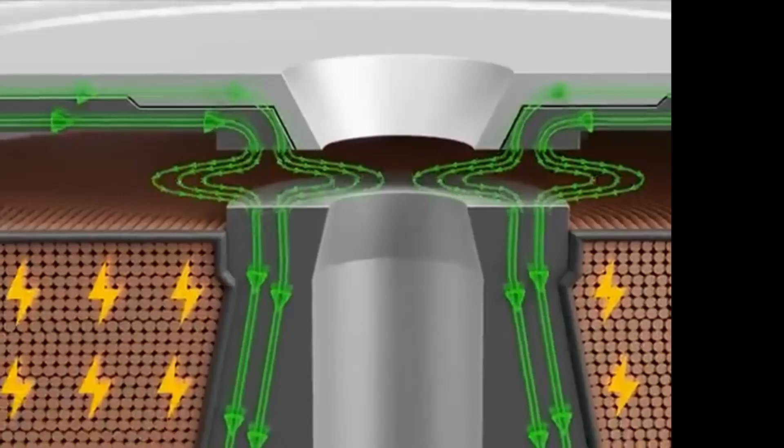And what is actually happening inside the strange material when you try to bend it? Let's go down to the atomic level.

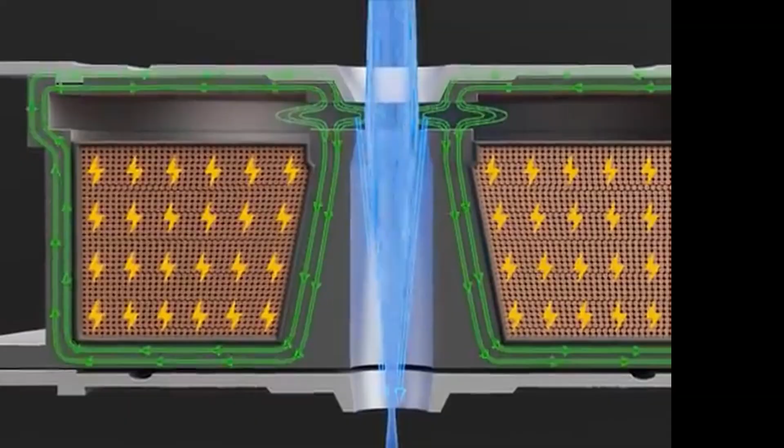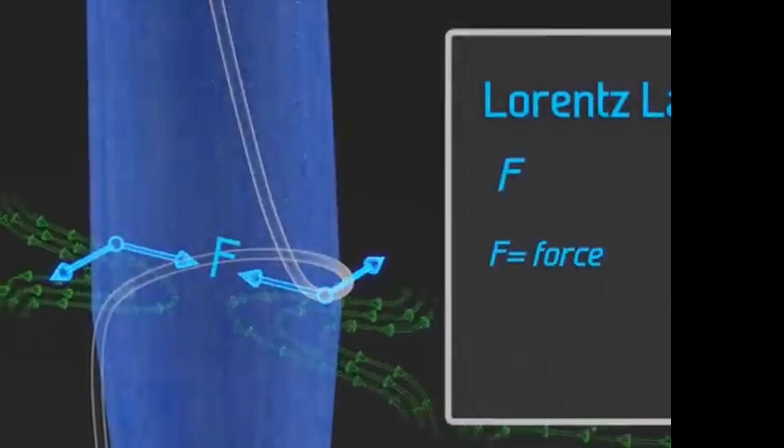Think about a piece of steel. It's strong, it's tough, it's relatively easy to manufacture, and it's been one of the foundations of modern civilization: buildings, bridges, cars, machines, ships, industrial equipment. But steel isn't perfect, and engineers have spent generations trying to improve it.

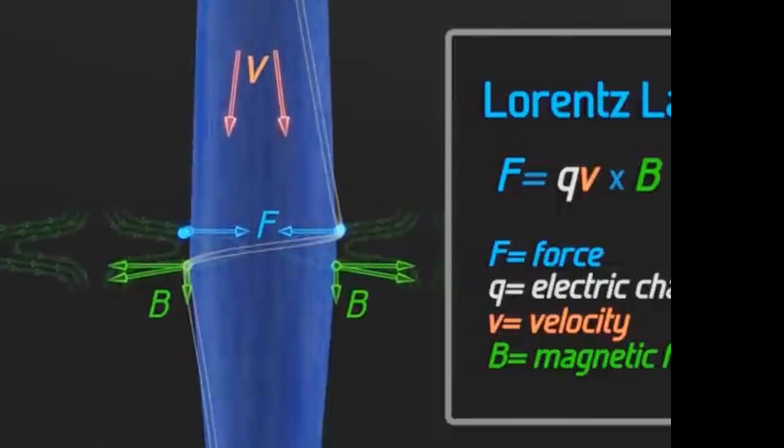More strength is desirable. Less weight is desirable. More heat resistance is desirable. More durability is desirable. But there is a fundamental problem: when you push a material toward extreme strength, you often make it more difficult for that material to deform.

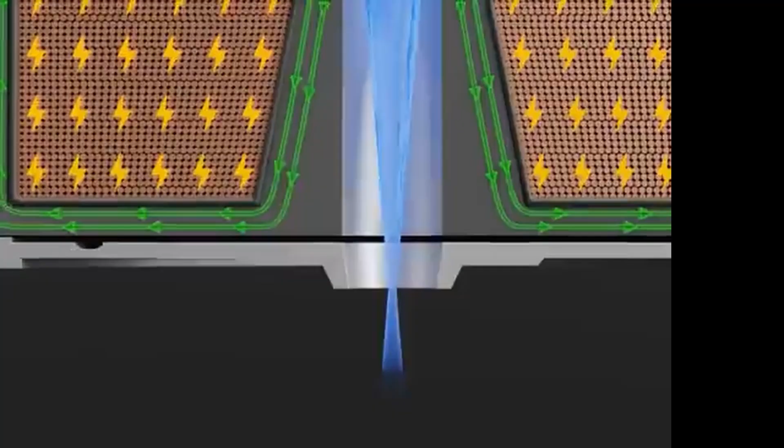And that can be dangerous, because imagine two materials. One is extremely strong but brittle. The other is somewhat weaker, but can deform before it fails. Which one would you rather have supporting a critical aircraft component?

The answer isn't necessarily the strongest one, because sometimes you don't want a material to simply resist deformation forever. You want it to give you a warning. You want it to absorb energy. You want it to deform rather than suddenly fracture.

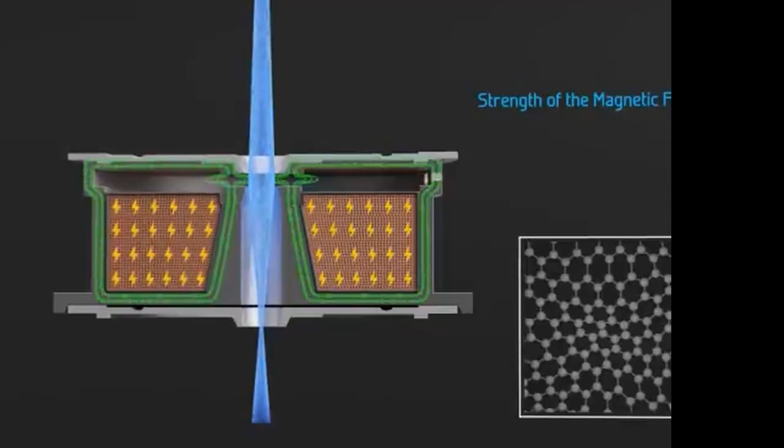And this is where material scientists encounter one of the great challenges in engineering: strength versus ductility. How do you make something extremely strong without turning it into something that breaks like glass?

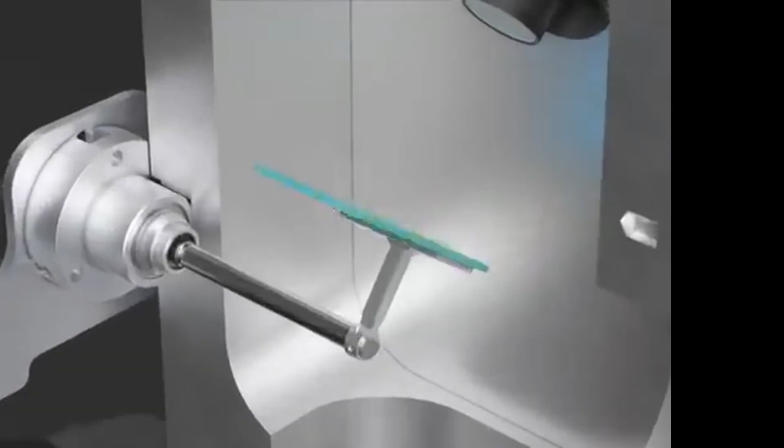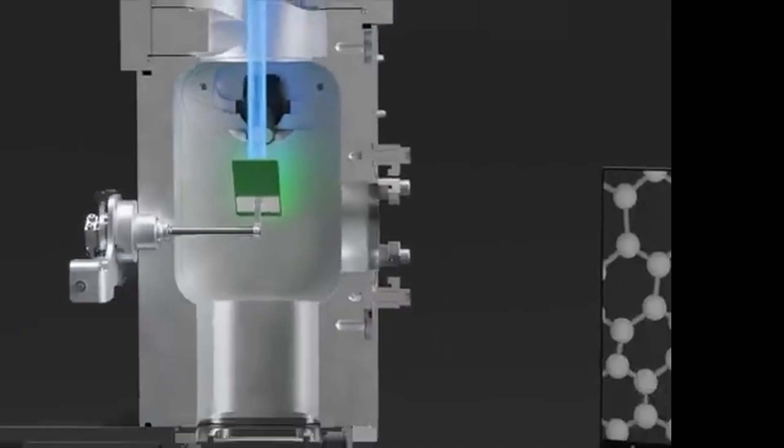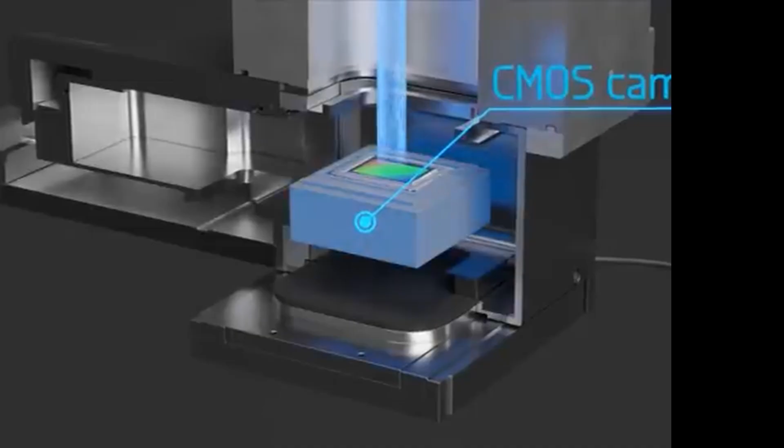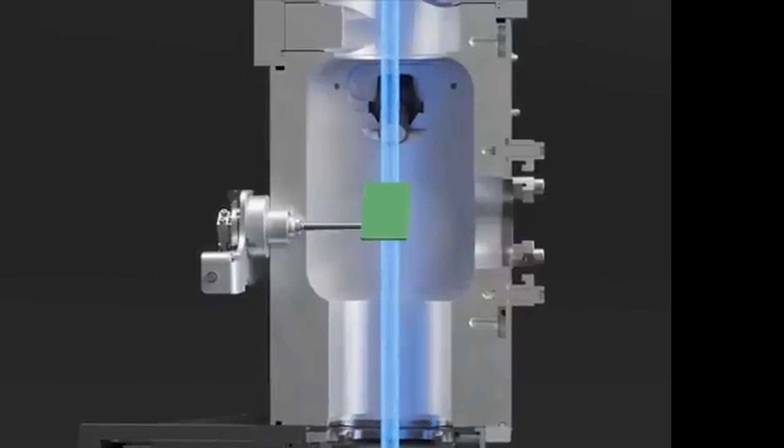This is where the Purdue researchers turned their attention to an unusual material called cobalt aluminum, or CoAl. CoAl belongs to a class of materials called intermetallics. Intermetallics are fascinating, they're made from metallic elements, but their atoms arrange themselves in highly ordered structures. That unusual atomic organization can give them remarkable properties: high strength, high melting temperatures, resistance to deformation at high temperatures, resistance to creep. All of those characteristics make intermetallics extremely interesting for demanding applications. There's just one problem: many intermetallics are notoriously brittle, and CoAl is a good example.

Normally, if you have a material that's incredibly strong but prone to brittle fracture, you have a serious engineering problem. So the researchers asked a deceptively simple question: could you change a material's internal structure instead of simply changing what the material is made of? That question led them somewhere very interesting.

All of those characteristics make intermetallics extremely interesting for demanding applications. There's just one problem: many intermetallics are notoriously brittle, and CoAl is a good example. Normally, if you have a material that's incredibly strong but prone to brittle fracture, you have a serious engineering problem.

So the researchers asked a deceptively simple question: could you change a material's internal structure instead of simply changing what the material is made of? That question led them somewhere very interesting.

Imagine zooming inside a piece of metal. At first, it looks completely solid, but zoom in far enough, and you discover an enormous world of atoms. Those atoms form crystal structures, and those crystals aren't perfectly flawless. They contain imperfections, and one of the most important types of imperfections is called a dislocation.

The name sounds like a defect, and technically it is, but here's the strange thing: sometimes a defect is exactly what you need. Dislocations allow layers of atoms to move relative to one another, and that movement is part of what allows metals to deform plastically. So if you could somehow engineer the right number of dislocations and control how they move, could you make a normally brittle intermetallic deform instead of simply cracking?

That was the challenge, and the researchers found a way to manipulate the material on a nanoscale. They introduced a huge number of dislocations into the CoAl during fabrication. But they also created something even more unusual: a network of amorphous interfaces.

Think of these interfaces as extremely small boundaries inside the material. Unlike the surrounding crystalline regions, these boundaries don't initially have the same orderly atomic arrangement. And that difference turns out to be extremely important, because when a material begins to deform, those interfaces can actually help generate new dislocations. It's almost as if the material contains its own microscopic system for accommodating deformation.

This is where the story starts to sound less like traditional metallurgy and more like science fiction. Imagine an army of tiny robots. They're standing in perfectly organized rows. Everything is orderly, everything is rigid. Then suddenly, the structure is pushed. Instead of the entire system collapsing, certain parts begin moving. New pathways open, and the structure reorganizes.

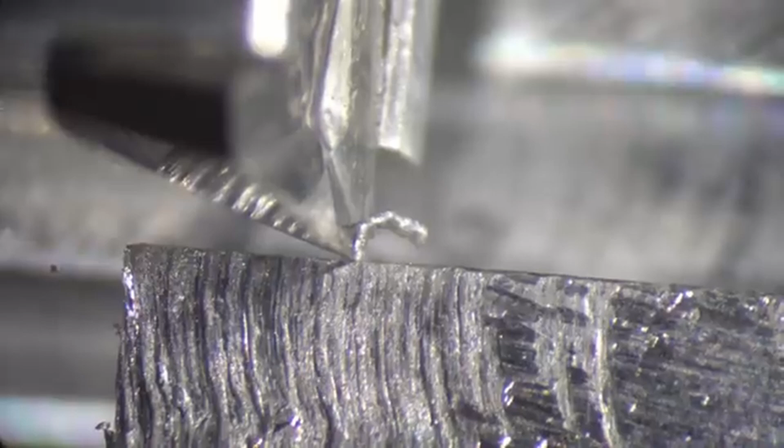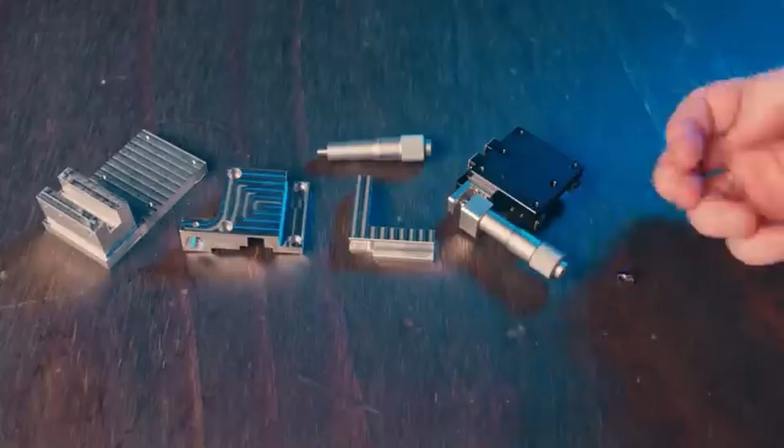Now, obviously, real-world CoAl doesn't behave like Beskar. There's no evidence that it can stop a lightsaber. It doesn't possess magical properties, and it isn't some indestructible supermetal. But the reason the comparison works is because both ideas revolve around something engineers have wanted for a very long time.

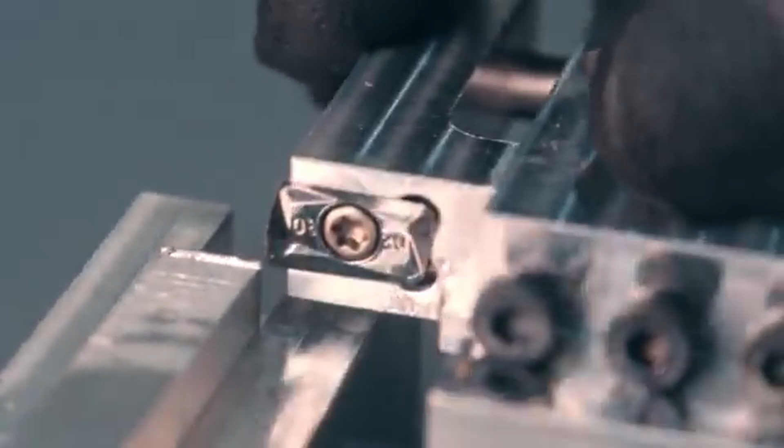Extreme strength without catastrophic brittleness. And that is actually a much more interesting scientific problem than simply inventing something that is stronger than steel. Because stronger isn't enough. What if your supermaterial is so brittle that one tiny flaw causes catastrophic failure? What if it can't be manufactured into complicated shapes? What if it can't tolerate repeated loading? What if it works beautifully in a laboratory, but falls apart when exposed to real-world conditions?

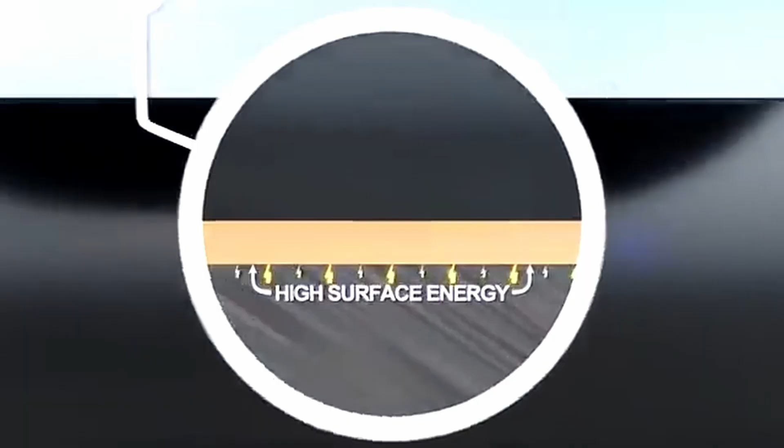That's why this new material is so interesting. The breakthrough isn't simply the number, it's the combination of properties. Let's put that number into perspective.

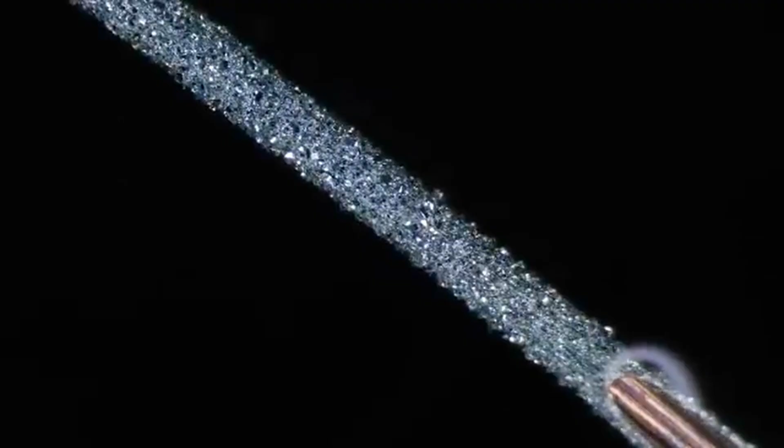The researchers reported a yield strength of approximately 6 gigapascals. A gigapascal is a billion pascals, and yield strength tells us approximately how much stress a material can withstand before it begins to undergo permanent deformation. For this specially engineered CoAl nanolaminate, that number is enormous.

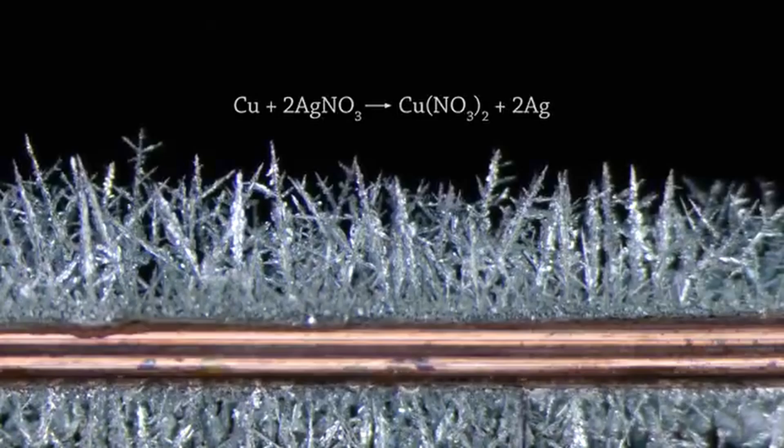Researchers describe it as approximately 6 to 10 times the yield strength of high-strength structural steel. But here's where we need to be careful: that doesn't mean you can take any random piece of this alloy, compare it with any random steel beam, and say this is 10 times stronger. Materials aren't that simple. Strength depends on what property you're measuring, how the material is processed, its structure, its dimensions, the type of loading, and the testing conditions.

The spectacular result here comes from a specially engineered nanoscale material architecture, and that's actually the more exciting part. Because the researchers are rediscovering a way of designing the internal architecture of a metal to produce properties that normally don't coexist, they aren't merely discovering a stronger ingredient.

Now comes the moment that really makes this material stand out. Imagine you have an extremely strong material. You expect it to be rigid, you expect it to resist deformation, and you certainly don't expect it to tolerate substantial plastic strain.

But in compression testing at room temperature, this CoAl system sustained about 15% plastic strain. That's remarkable because bulk CoAl is normally very brittle at room temperature. So why doesn't it simply crack?

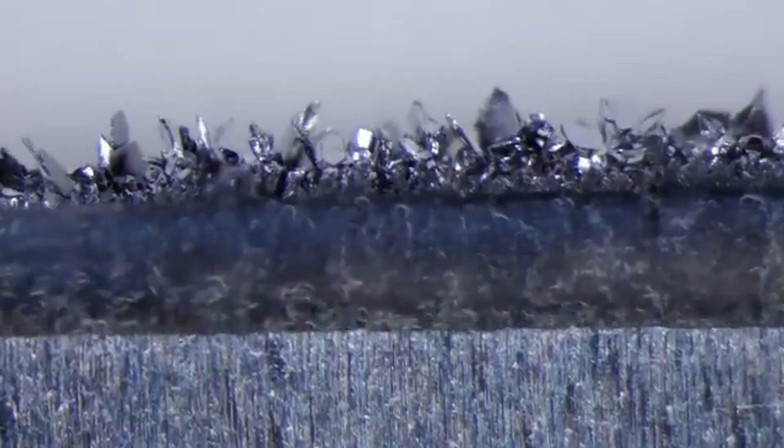Because the nanoscale architecture changes the way deformation happens. Instead of allowing a crack to race through material, the engineered interfaces and dislocations provide mechanisms for the material to accommodate stress. And that raises another fascinating question.

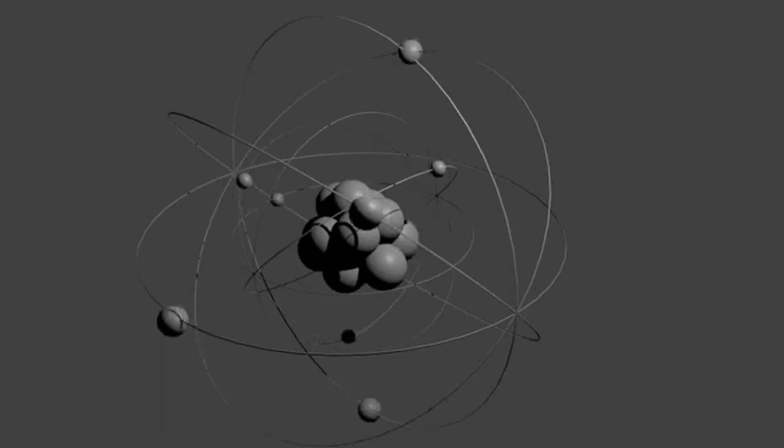Could the real future of materials engineering be less about discovering new elements and more about learning how to arrange the atoms we already have? Think about that. The periodic table isn't changing. Cobalt isn't suddenly a new element. Aluminum isn't suddenly a new element. The breakthrough is in the architecture. The researchers are manipulating matter at scales so small that we're effectively engineering the behavior of atoms and defects inside material. And that could be a profound shift.

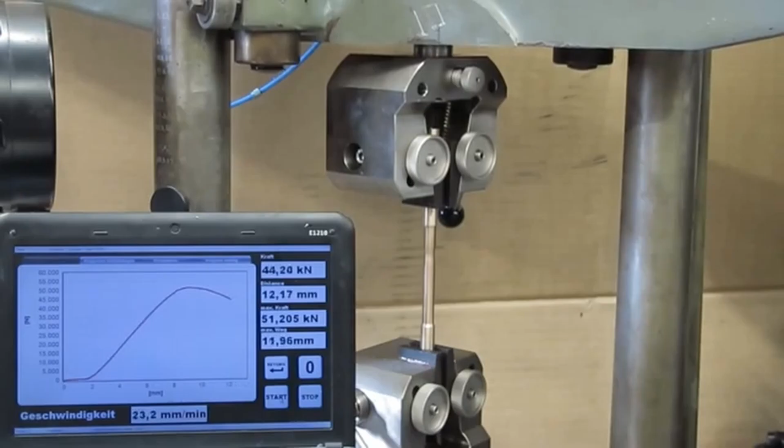Now imagine where a material like this could become useful. One possibility is turbine engines. Inside a gas turbine, components experience tremendous mechanical forces and extreme temperatures. A turbine blade is spinning incredibly fast, and as it spins, centrifugal forces are constantly trying to pull the material apart. Now imagine being able to build components from a material that could withstand substantially higher stresses. Could an engine spin faster? Could components become lighter? Could engineers design more efficient systems? Could future aircraft engines operate under conditions that would be too demanding for conventional materials? Those are the kind of questions researchers are beginning to investigate.

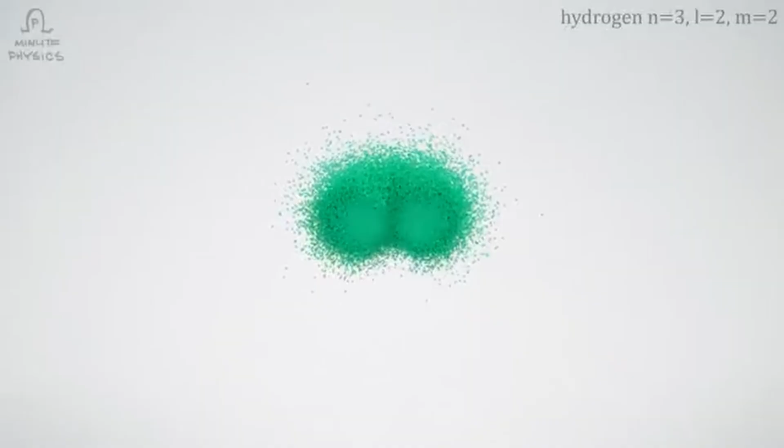The Purdue team specifically points toward potential applications in turbine blades and next-generation aero engines. And the implications go beyond aircraft. The same fundamental challenge appears in power generation energy systems, advanced manufacturing, space technology, and other environments where materials are pushed to their limits. Here's where the science gets even more interesting.

This material isn't ready to replace steel everywhere tomorrow. And that's important because laboratory breakthroughs and commercial technologies are two very different things. The researchers produce their alloy using a technique called magnetron sputtering deposition. Instead of simply melting a pile of metal, pouring it into a mold, and letting it cool, the process allows the material to be built from alloy vapor. That unusual, non-equilibrium manufacturing process helps create the nanoscale architecture and high density of dislocations that give material its unusual properties. But here's the challenge.

Can you make it at industrial scale? Can you produce large components? Can you manufacture complicated shapes? Can the properties remain consistent throughout a large object? Can the material survive millions of cycles? Can it handle extreme temperatures? Can it be economically manufactured? Those questions still need answers. And that's why the next stage of this research could be even more important than the initial discovery.

The researchers are looking at whether the same strategy can be applied to bulk alloy nanocomposites and potentially to other intermetallic materials. If the concept proves broadly applicable, then the discovery becomes much bigger than one unusual alloy. It becomes a new strategy for designing metals.

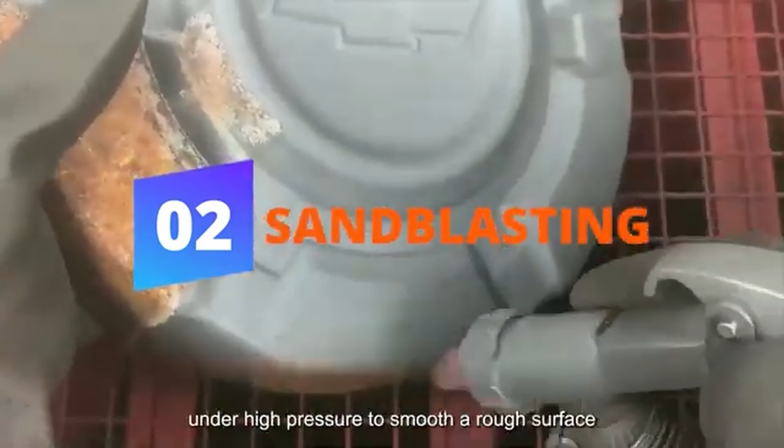And that's where Marvel's vibranium provides another interesting comparison. Vibranium is fictional, but the idea behind it is strangely familiar. A material that seems to violate the normal rules. A material that can absorb extraordinary amounts of energy. A material that possesses properties far beyond ordinary metals. Real materials obviously don't behave like vibranium, but science has repeatedly shown us something remarkable. Properties that once seemed impossible can become possible when we change the structure of matter. Carbon can become diamond. Silicon can become the foundation of modern computing. Metals can be engineered at nanoscale dimensions to behave in ways their conventional forms don't.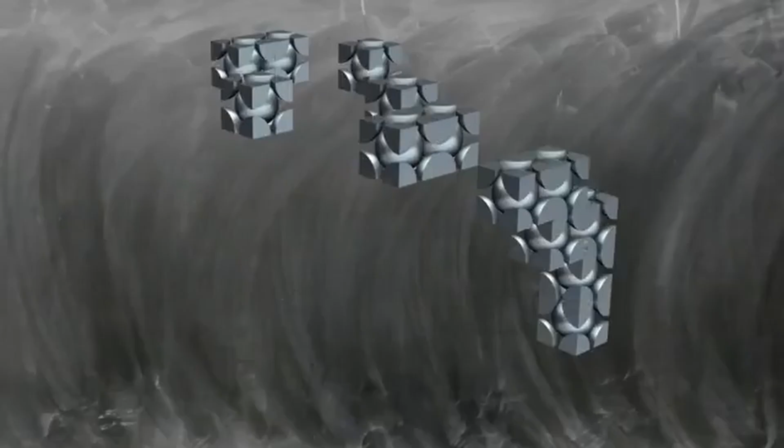And now, we're learning how to make an intermetallic that combines extreme strength with unusual deformability. So perhaps the better question isn't, when will scientists invent vibranium? Maybe it's, how many properties that seem impossible today are simply properties we haven't learned how to engineer yet?

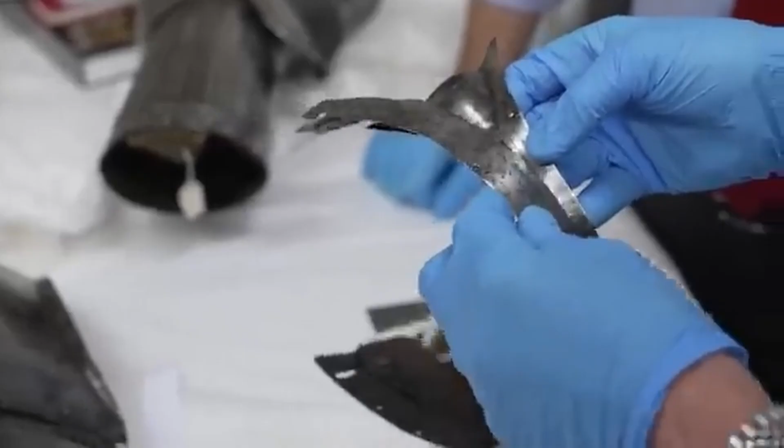Because deep down, that's what this discovery is really about. It's a battle happening at a scale far smaller than anything we can see. Atoms are arranged, defects are introduced, interfaces are engineered, stress begins moving through the material, and microscopic structures respond. The final piece of metal may look completely ordinary to the naked eye, but inside, there's an elaborate architecture, and that architecture determines whether the material bends, deforms, or breaks.

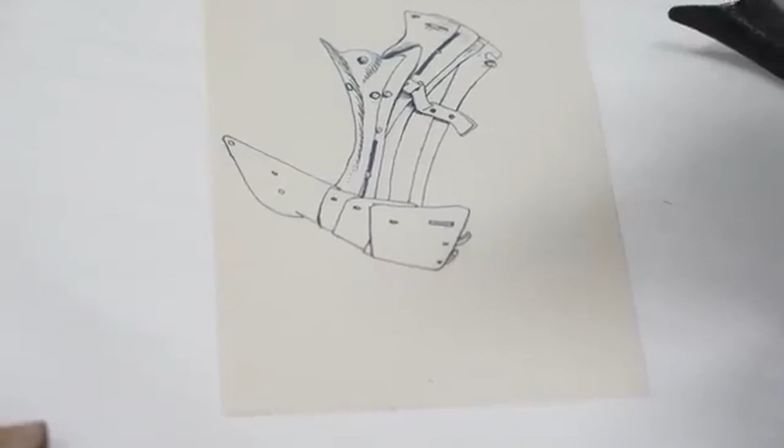This is one of the most fascinating things about modern materials science. We used to think of materials largely in terms of what they were made from: steel, aluminum, titanium, copper. Now we're increasingly thinking about something different. How are the atoms arranged?

Because two materials with essentially the same ingredients can behave dramatically differently if their internal structures are different. And that's exactly what this research demonstrates.

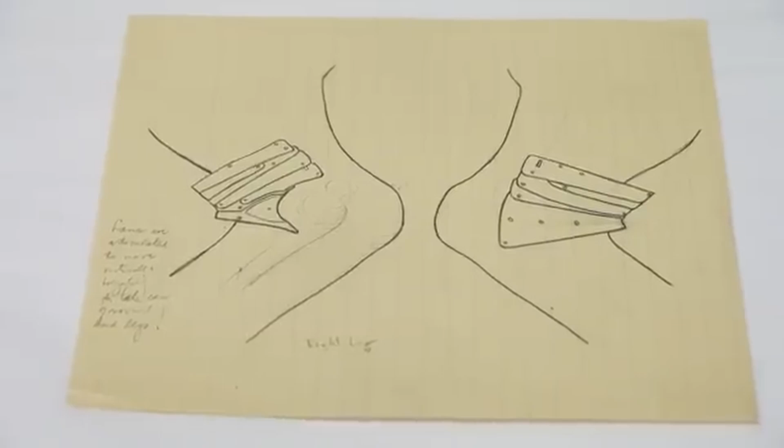Now let's imagine the researchers succeed, and this type of architecture can be reproduced reliably in large components. What happens next? Could we create lighter turbine components? Could aircraft engines operate at higher rotational speeds? Could aerospace structures become stronger without simply becoming heavier?

Could spacecraft use new generations of materials capable of surviving extreme mechanical environments? Could energy systems become more efficient? Could machines operate under conditions that currently demand massive amounts of material? And perhaps even more intriguingly, could we eventually design materials for specific jobs at the atomic level?

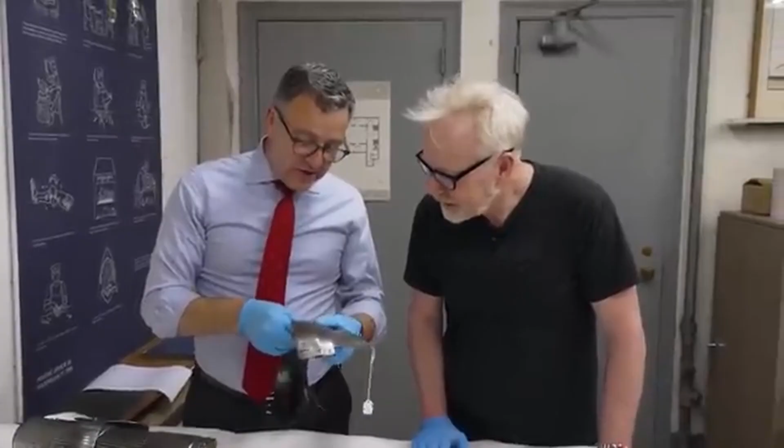Imagine telling a computer, I need a material that's extremely strong, resistant to heat, lightweight, fatigue resistant, and capable of deforming in a controlled way. Then imagine an AI system searching millions of possible atomic architectures, simulating them, manufacturing the most promising candidates, testing them, and feeding the results back into the next design.

That future isn't purely science fiction. Researchers are already using computation, simulation, advanced manufacturing, and increasingly sophisticated characterization techniques to explore enormous materials design spaces. The metal of the future might not be discovered. It might be designed. And this brings us back to Mandalore.

In Star Wars, Beskar isn't valuable simply because it's strong. It's valuable because it possesses a combination of properties that make it extraordinary. It's strong, it's durable, it's workable, and it enables technology that ordinary materials can't. Real-world materials science has a similar goal, not to create magic metal, but to find combinations of properties that nature doesn't conveniently give us: strength, ductility, toughness, heat resistance, low weight, fatigue resistance, manufacturability.

Sometimes those properties fight each other. The breakthrough comes when engineers discover a way to make them cooperate. And that's what makes this cobalt aluminum research so compelling.

It isn't just, scientists made a stronger metal. It's, scientists found a way to make an ordinarily brittle intermetallic substantially more deformable while retaining extraordinary strength. That is a much bigger idea.

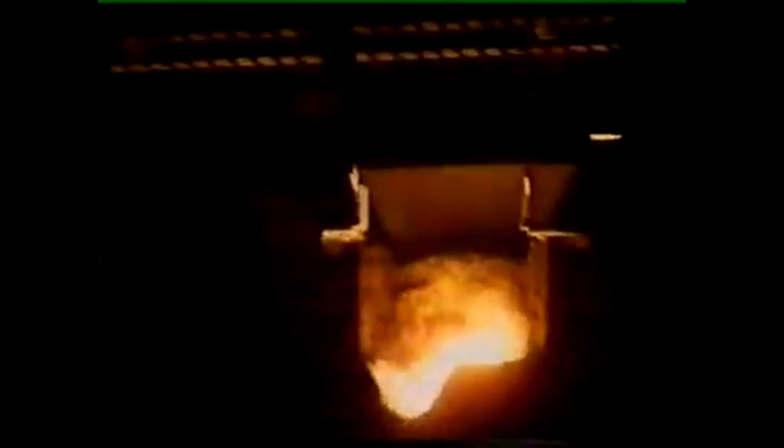So, are we actually getting closer to real-life Beskar? Not literally, not yet. This cobalt material isn't indestructible. It isn't a lightsaber-proof metal. And it certainly isn't a fictional substance from Star Wars. But if by Beskar we mean something slightly different, a material that combines extraordinary strength with properties that shouldn't normally coexist, then perhaps we're already beginning to glimpse that future.

Because the most exciting part isn't that scientists made something 6 to 10 times stronger than structural steel. The most exciting part is that they challenge one of the assumptions we've carried about materials for generations: that extreme strength and substantial flexibility have to be enemies.

What if they don't? What if the strongest materials of the future aren't simply harder? What if they're smarter? What if their internal structures can redirect stress, absorb deformation, repair pathways, and change how they respond as they're being pushed to their limits?

And what if the next breakthrough doesn't come from finding a mysterious metal on another planet, but from looking deeper into the metals we already have? Because somewhere between the fictional world of Beskar, the impossible promise of vibranium, and the real atomic structures inside a laboratory-made alloy, there is a fascinating possibility.

We may be entering an era where engineers don't simply build materials, they program them. And if that happens, the machines of the future may not need fictional metals from distant galaxies. They may be built from something even more remarkable, matter engineered atom by atom. And perhaps that's the closest thing to science fiction becoming reality that we could possibly ask for.

So here's the question I'd leave you with. If scientists can make a metal that's extraordinarily strong without making it extraordinarily brittle, what happens when they learn to control almost every property of a material at the atomic level? Because if this is only the beginning, we may not have seen the metal of the future yet. We may only have seen its first prototype.